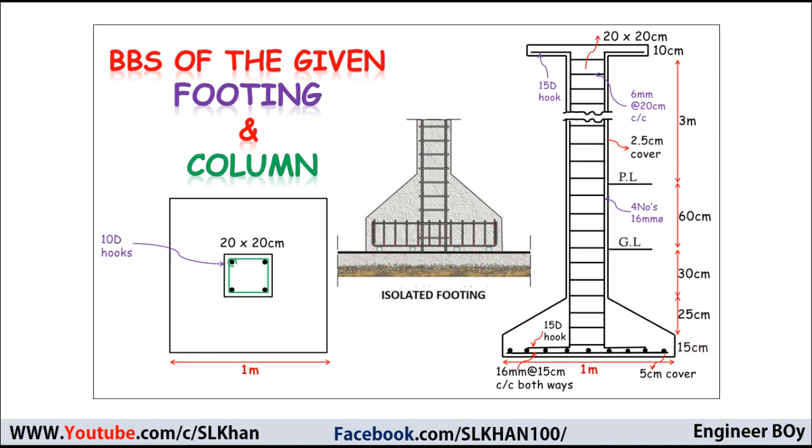Previously on Engineer Boy, we have already learned the steel calculation for an isolated footing. But in this video, our approach is to work out the concrete work for isolated footings. I mean for all types of isolated footings, because the method we're gonna discuss over here is enough for all types of isolated footings, such as flat, stepped, square, rectangular and circular isolated footings, of course.

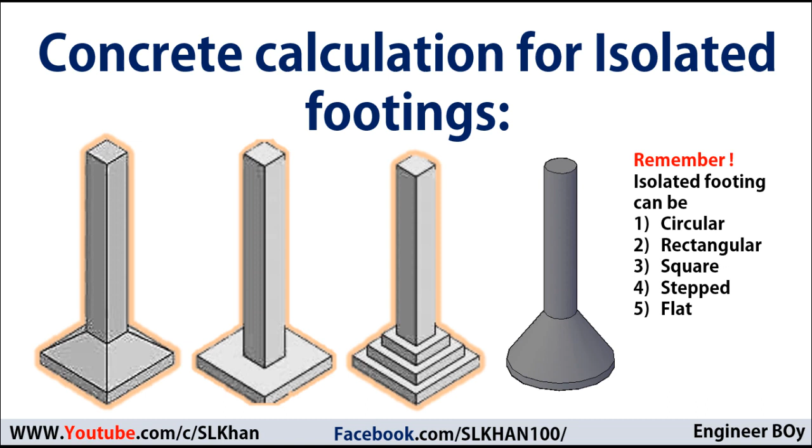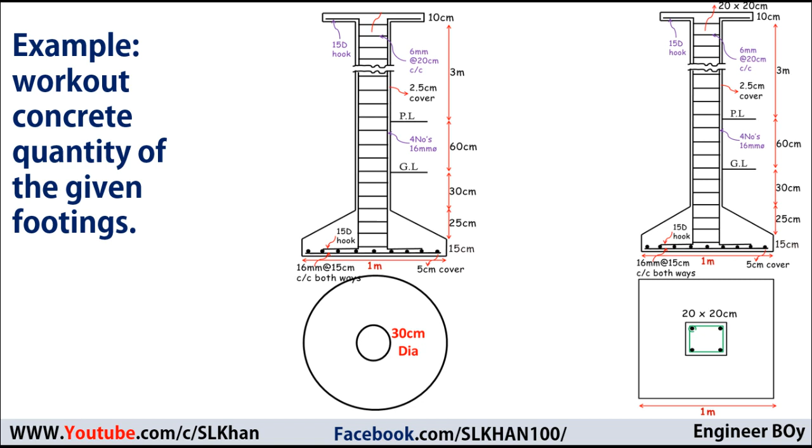And to learn these, I'm gonna have just a few examples, such as to work out the quantity or the concrete work of these two isolated footings. So let's go ahead and give solutions to these problems. And the first thing, I'm gonna work out this one. And to do it, I'm gonna divide this into three parts or portions, just like that.

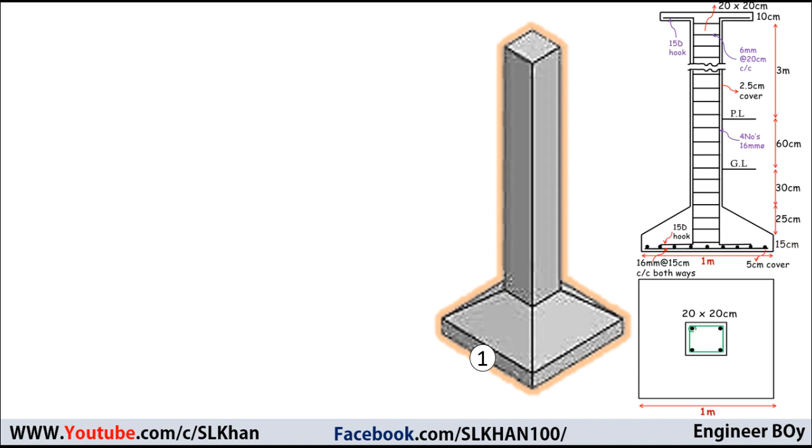So the total concrete for the square isolated footing must be the concrete for portion 1 plus the concrete for portion 2 plus the concrete for portion 3. So we'll just calculate these separately and then add them together so we can get the total concrete work for the square isolated footing. Alright, so first I'm gonna calculate portion 1, which is just like a flat slab. So it is simple and straightforward.

Its area times thickness must be its volume. And the area is given. In the drawings, if you see, it is a square of 1 by 1. So its area must be 1 by 1 times its thickness, which is also given, and that is 15 centimeters, or 0.15 meters. So its concrete work must be 0.15 cubic meters.

And next I'm gonna calculate portion 3 because portion 2 is a little tricky. Portion 3 is just like a vertical beam, or you can say a rectangular prism. So its volume must be the multiplication of its three sides, or the cross-sectional area times its height. And as you can see from the drawings, its cross-sectional area must be 20 times 20 centimeters, or 0.2 times 0.2 meters. That's so simple.

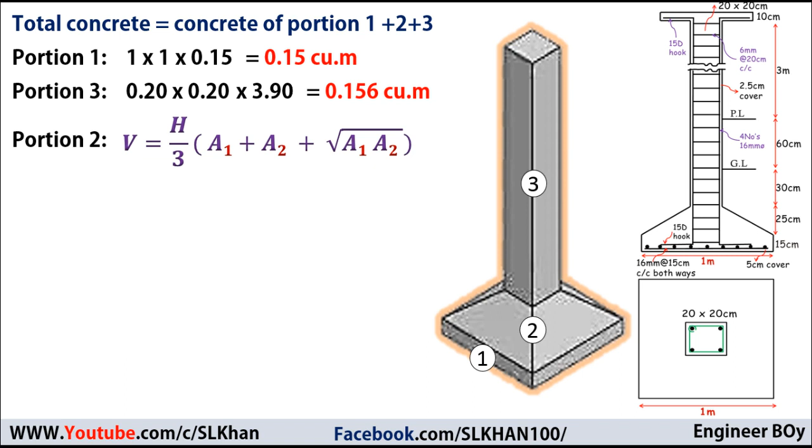This formula can be used to determine the volume of a frustum of a cone or frustum of a pyramid: V equals h by 3. H represents the height, which in this case is 0.25 meters or 25 centimeters. So 0.25 divided by 3 times A1 plus A2. Remember, A1 and A2 are just the top and bottom areas.

If you look at the model just like this, A1 can be taken as the top area, just like this one, 20 times 20. And A2 can be taken as the bottom area, which can be 1 times 1. Or these can also be taken reversely: A1 can be taken as the bottom area and A2 as the top area. That is not a problem.

Alright, so let me take A1 as the top area and A2 as the bottom area. So A1 is going to be 0.2 meters times 0.2 meters and A2 is going to be 1 times 1.

It is already given in the drawings. So now we're gonna put all these values in that formula to get the volume of portion second. And by doing a little mathematics, we can get the volume of portion second as 0.103 cubic meters. Now finally, we got the total concrete work as 0.4093 cubic meters for the square isolated footing.

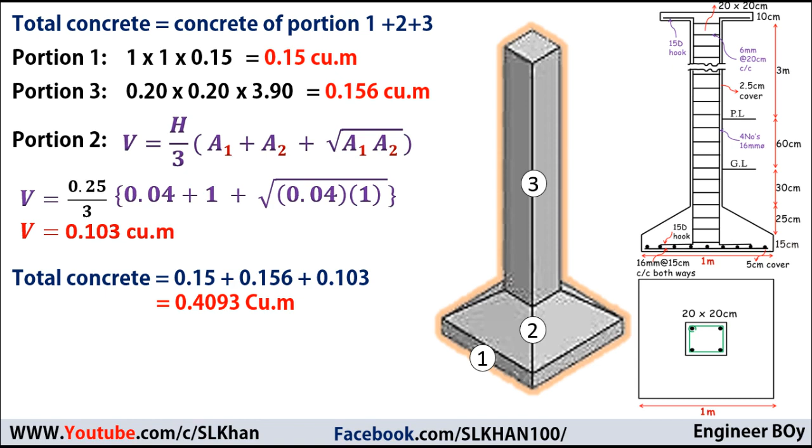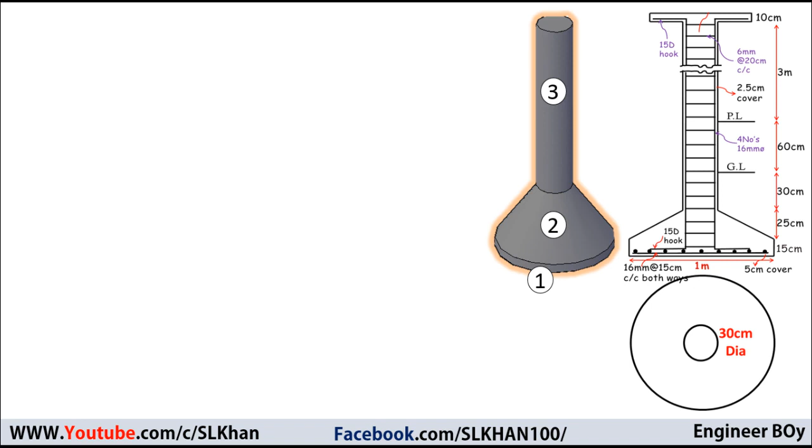And next I'm gonna go ahead for the second example, which is an example of a circular isolated footing. And again, I'm gonna divide this into three portions, and the total concrete work must be the concrete of portion 1 plus second plus third. So portion 1 is just a flat slab, but this time it is circular. In the previous example, it was a square. This time we got a circular, okay?

So its area times thickness, and the area of a circle is, remember, pi d squared divided by 4, times thickness. So it is going to be the volume of portion first. Now the diameter of that portion is only 1, it is already known from the drawings. If you see over here, it is 1 meter. So pi times 1 squared divided by 4 times the thickness, which is 15 centimeters or 0.15 meters. So the volume of portion 1 is going to be 0.118 cubic meters.

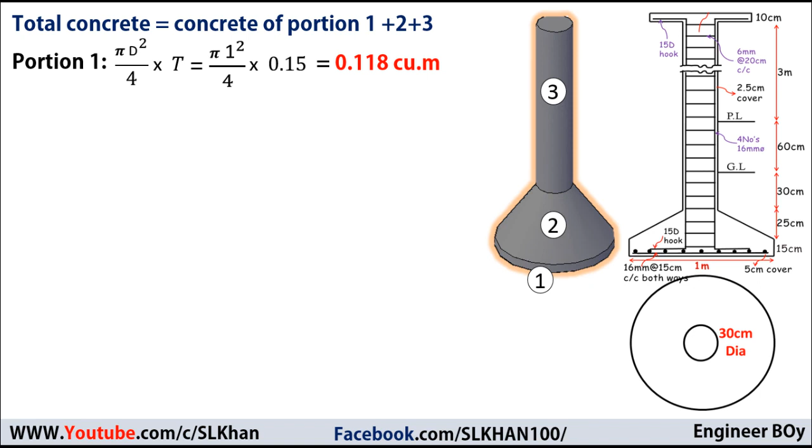And now if you look to the second portion, of course it is a frustum of a cone, so we can use the same formula just used in the previous example. The only thing we need over here is h, A1 and A2. h is already given, which is 25 centimeters. So we're gonna calculate A1 and A2. Let's say A1 is going to be the top area, so pi d squared divided by 4 can be used. This time the top diameter is 0.30 meters. So A1 is going to be pi times 0.30 squared divided by 4, which is 0.0706 square meters.

And A2 is going to be pi d squared divided by 4. The diameter of the bottom is 1 meter. So A2 equals pi 1 squared divided by 4, which is 0.785 square meters. So now by putting these values in the above formula and by doing a little mathematics, we can get the volume of portion 2 equals 0.0909 cubic meters.

And now let me come to portion third, which is just a vertical cylinder. So its area times its height must be the volume of portion 3, which is pi d squared divided by 4 times its height, because it is also a circle in section. The diameter of that cylinder is 30 centimeters, or 0.30 meters. So pi times 0.3 squared divided by 4 times its height, which is 3.9 meters. And that is the volume of portion 3, which is 0.275 cubic meters.